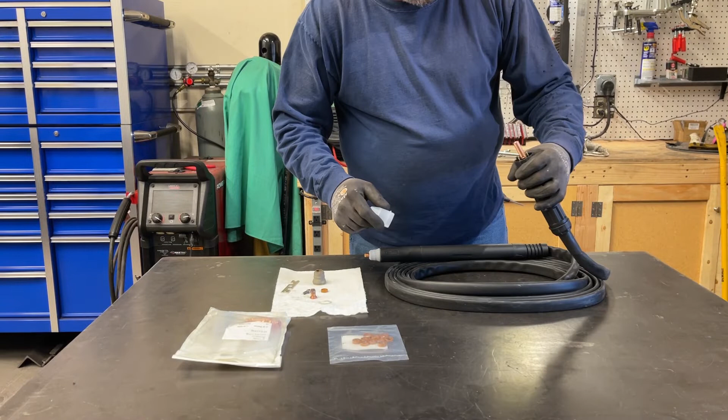So I went ahead and purchased a new torch head from Everlast, and it was in stock, and they sent it to me pretty much right away. I got it in just a couple of days. Wasn't cheap, but hopefully it solves our problem. I got some new swirl rings. I got a 10-piece consumable set and the new torch lead, which is 25 feet long. And it's a 4-pin connector, just like the other. Looks like this torch has actually been tested.

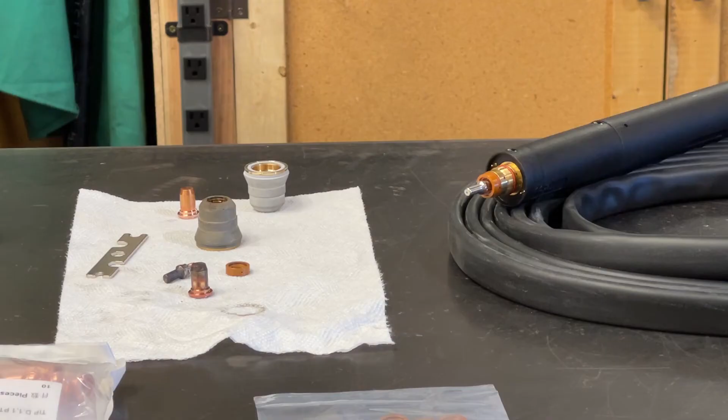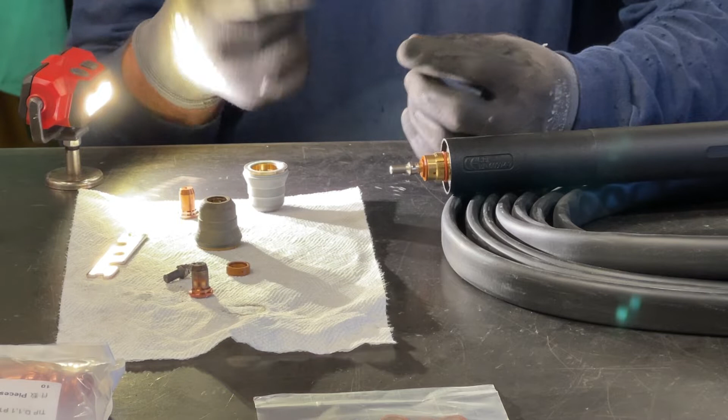As far as consumable parts go, it came with a new swirl ring. Now, I think it'd be pretty hard to make out, but it looks to me that the swirl is going in this direction, or the airflow. And the swirl ring, the inside is turning in this direction, which would be tightening the electrode. Put this back in place. Tip back in.

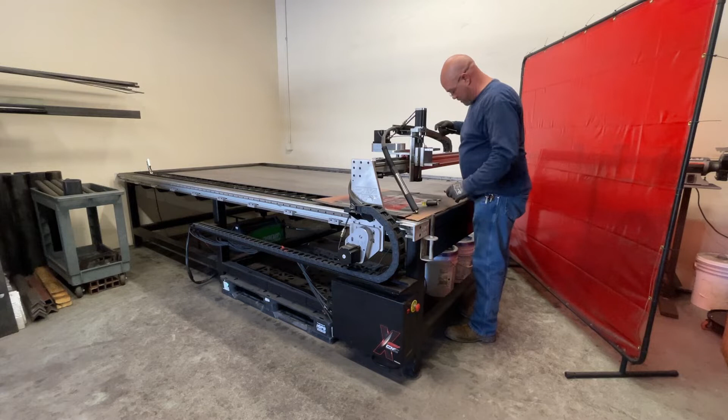As you can see, it's a PTM 60 amp torch head. Like I said, it's 25 feet long, which is longer than the one that I have, but I think it should suffice. It pretty much looks like it's the same as the other. It's slightly different, but in general, it's the same. I got a table full of water here, so we're trying to be careful not to drop anything.

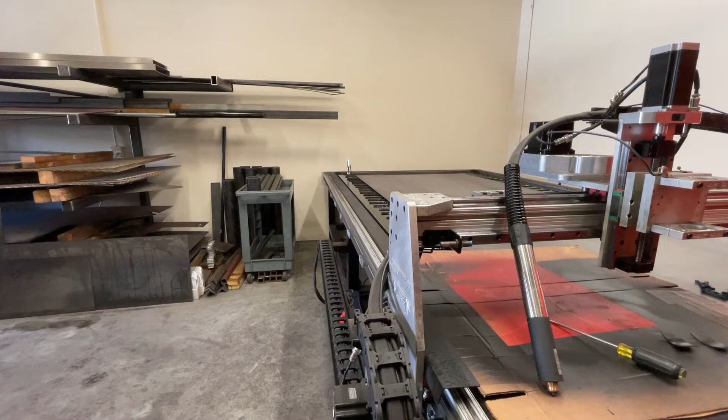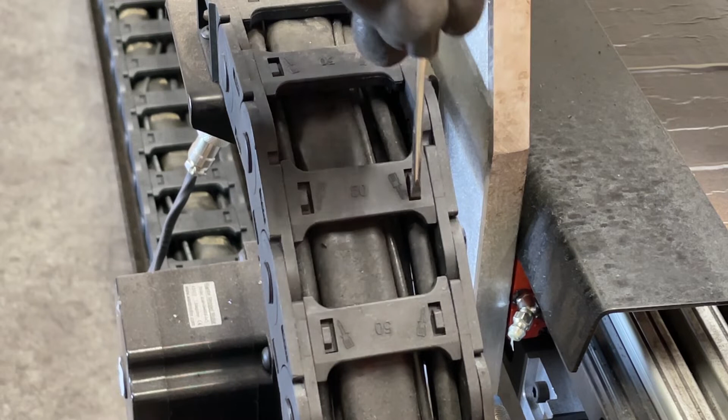If you ever try to take apart this drag chain and you don't know how to do it, you'll end up breaking it. So let me show you how these drag chain pieces come apart. You can see there's a little screwdriver icon there. Ideally, you get a little micro screwdriver. You get under there and you give it a little pull and it'll disengage, and you can see here where it's cracked from me doing it before, but that's the idea.

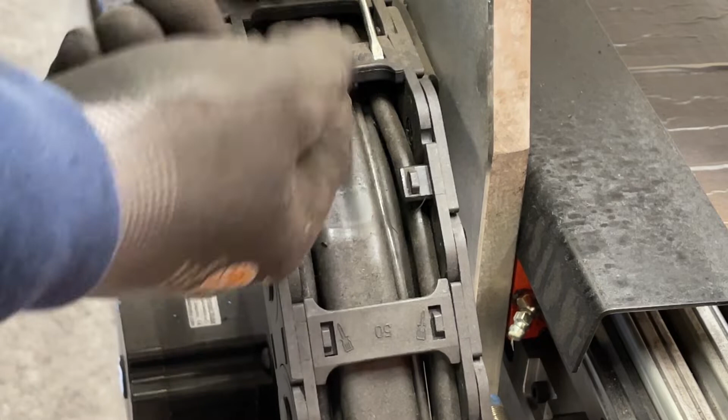So if you're not careful, they will break. Luckily though, STV CNC sent a whole bunch of extra ones.

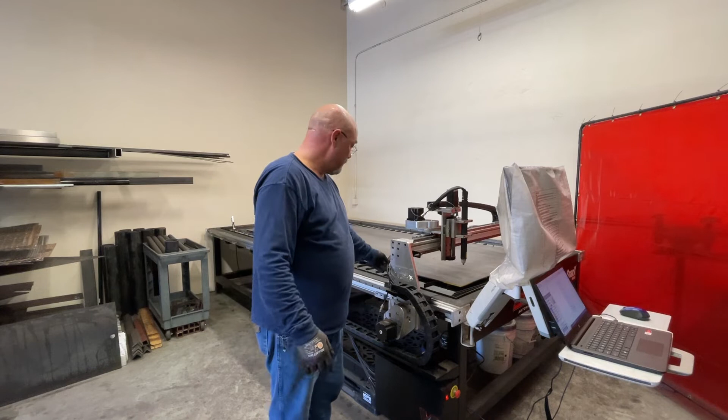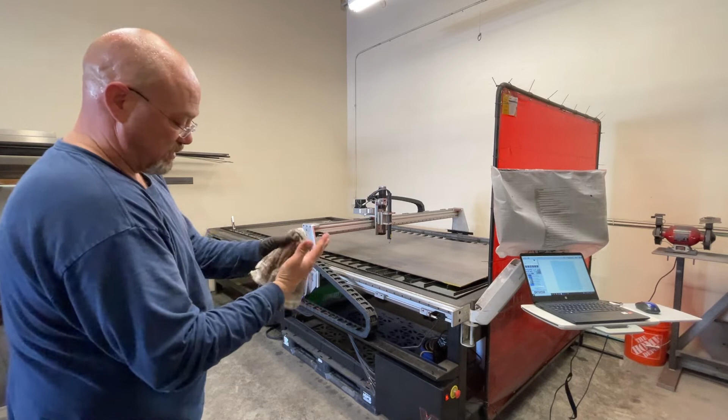Okay, so that only took about an hour. Now, just test it. Obviously, I don't want to start cutting a new project out on this sheet before I test the torch and make sure it actually works. So I got a little bit of space there. I'll find a scrap piece. I don't know if circles are the best thing to test because when I cut circles, the edges aren't very square. All right, let's cut this part out and see what happens there.

Okay, so that was an exciting adventure. I had to mess around a little bit with some of the settings, change the voltage a little bit. We were having a couple of issues, but I think all in all it went well. I had to change the consumables out twice. Not bad for as many cuts as I had to do, as much linear footage of cutting. They don't last as long as the high-end stuff does, but they get the job done. Anyway, go ahead and get this pulled out of here and swap out for the next sheet.

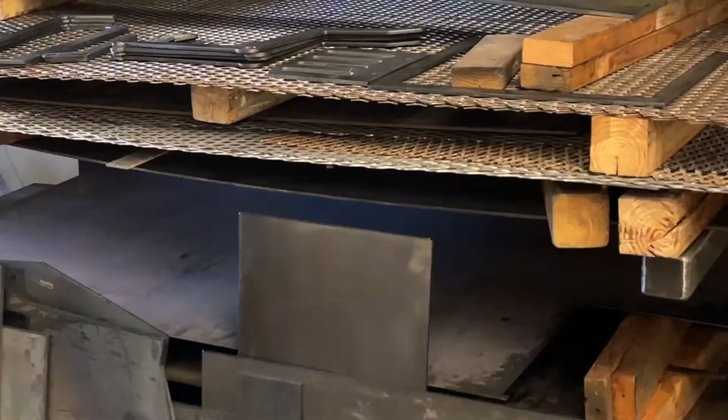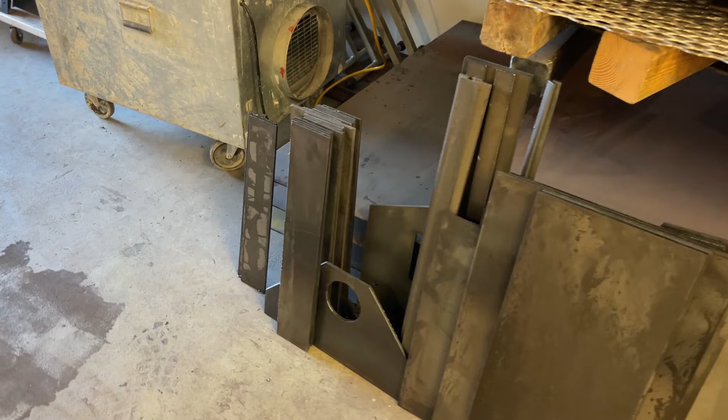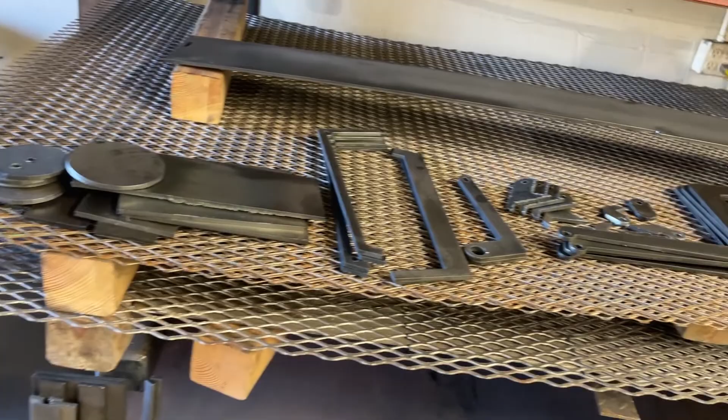Okay, so you got tuning plates there, you got part of the collector, part of the firebox, some of the main body of the smoker, all the little parts and pieces. There's the actual damper for the firebox. And there's the firebox door. So it's a lot of pieces, just under 2.5 sheets, so you can see what I got left there.

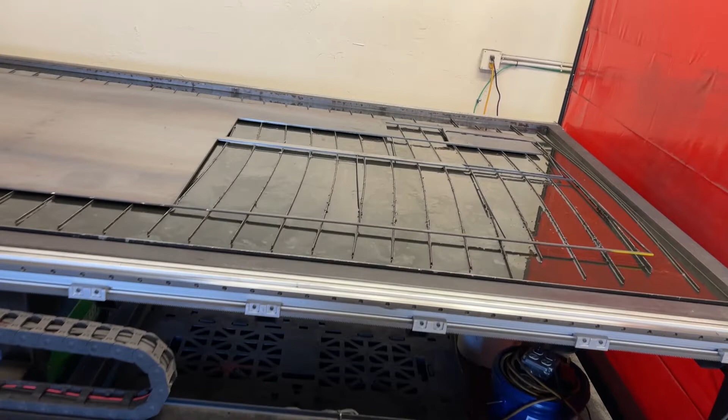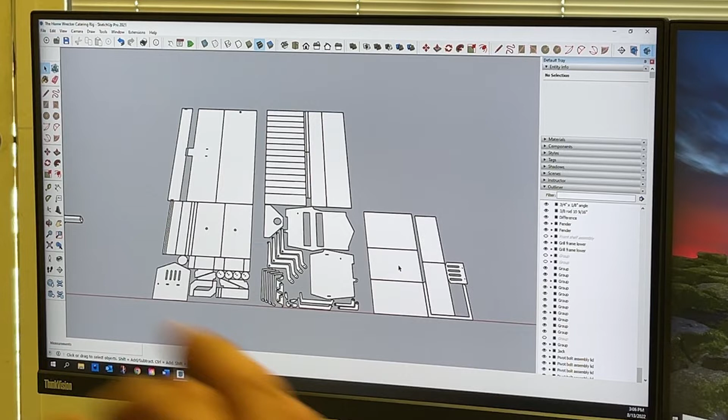Okay, so here is all the parts that we just cut out. You can see it's a lot of parts, but it's about 2.5 sheets of 4x10 1/4-inch hot rolled plate. They weigh 408 pounds each. Obviously there's some scrap from it, so probably 375, 380, somewhere in there. So even if we just called it 400, it'd be 400, 800, and then 200. It's about 1,000 pounds, probably 900 pounds of material just in the plate.

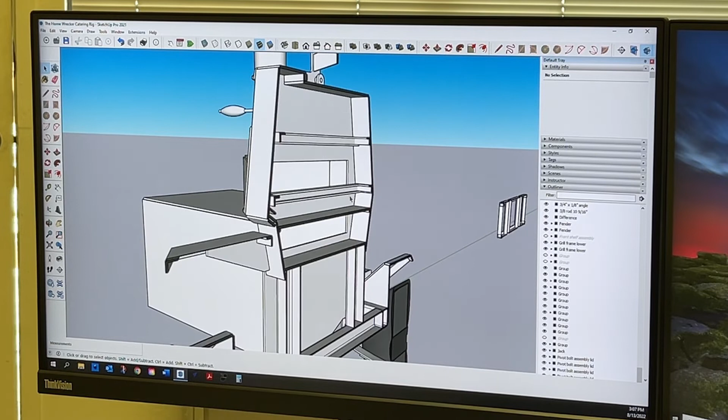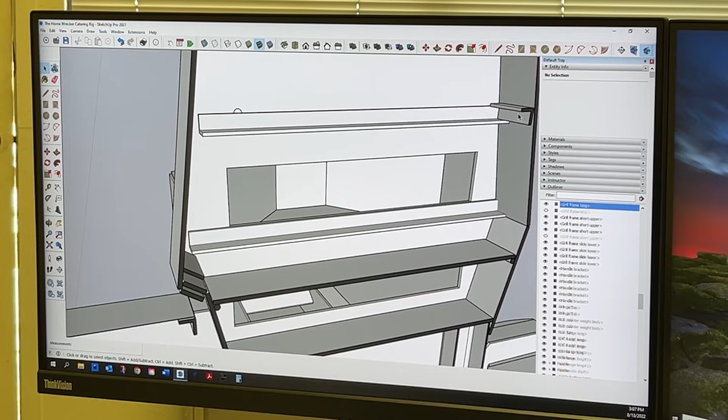So now we got to start building it, and got a couple of things we need to do before we start welding it together. Let's see, we've got these angles that the cooking grates sit on. You can see right here, there's a bolt. And if I don't weld that bolt in first from the back side, do a nice plug weld and grind it off, I can't weld these on.

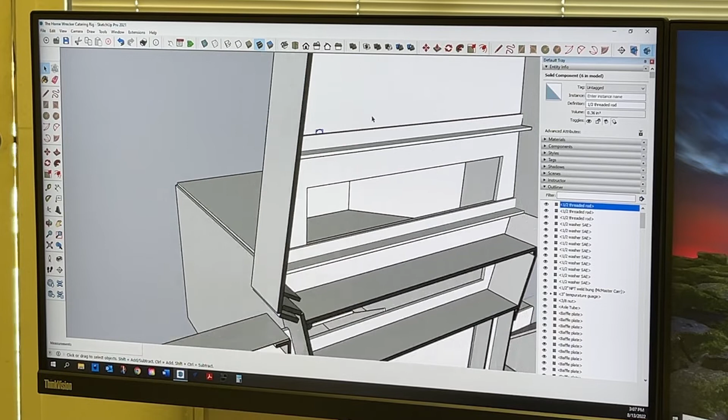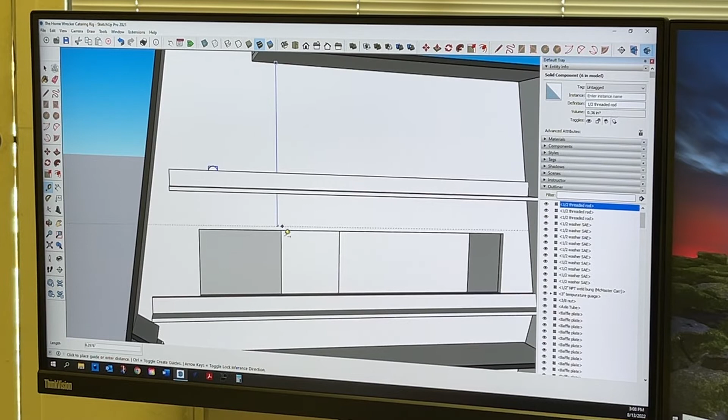And I like to weld these parts on prior to the sides, that way I can get them exactly where I want. So take a dimension from here down to the top, 5.5 inches. And then from there down 12 inches. So 5.5 and 12.